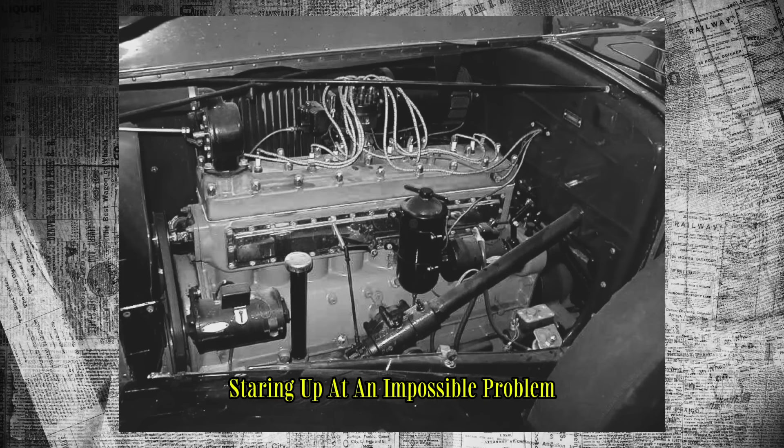Picture a mechanic in 1927, lying on his back under a Chrysler sedan, staring up at an impossible problem. Oil was leaking from the engine, seeping into the clutch mechanism buried deep between the transmission and flywheel. The car lurched and hesitated. Drivers complained, and there was no way to fix it.

The bearing that was supposed to align everything was pressed so far inside the drivetrain that you couldn't reach it with a grease gun. You couldn't service it without tearing half the car apart. It was a nightmare trapped inside a machine.

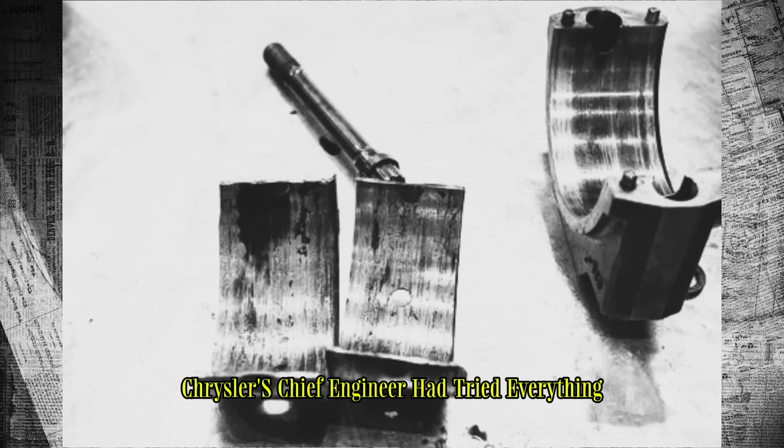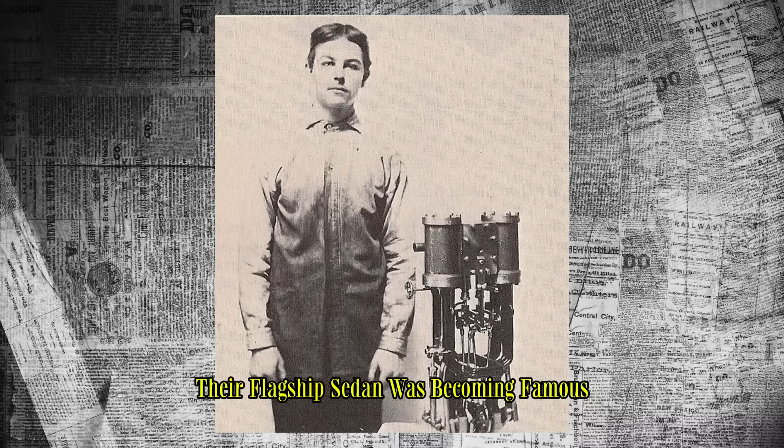Carl Breer, Chrysler's chief engineer, had tried everything. Tighter seals, they leaked anyway. Grease-packed bearings, they just attracted more oil. Every solution created a new problem. Warranty claims were piling up. The Chrysler 70, their flagship sedan, was becoming famous for all the wrong reasons. Dealers were furious, customers were frustrated, and Breer was losing sleep.

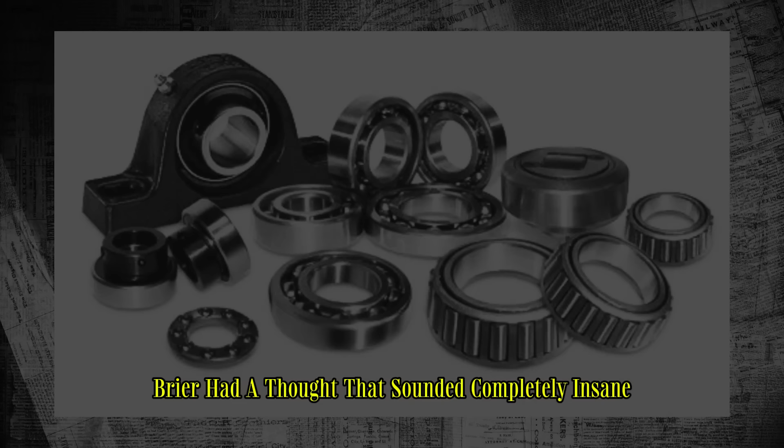Then one night, sitting in his office, surrounded by failed prototypes, Breer had a thought that sounded completely insane. What if the bearing could carry its own oil? What if you could build a piece of metal that was simultaneously solid enough to hold thousands of pounds of pressure and porous enough to store lubricant like a sponge?

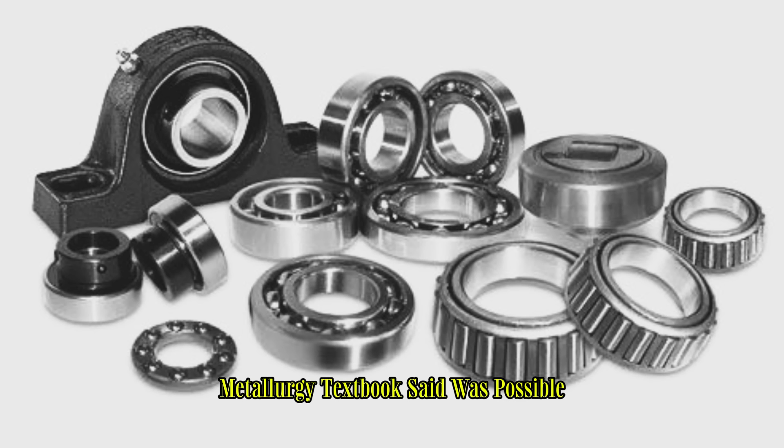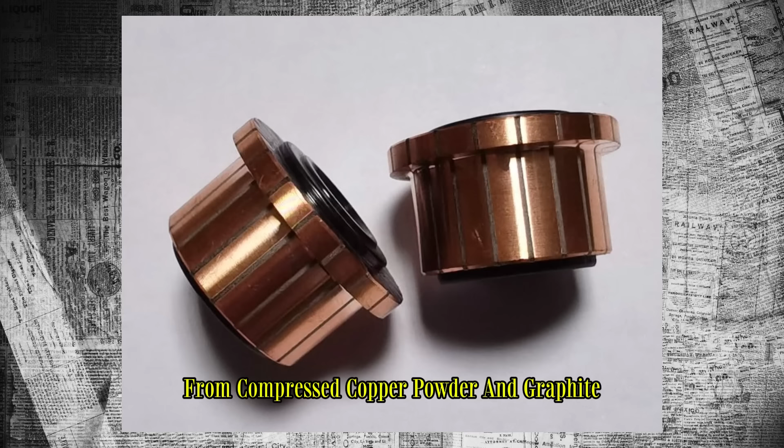It violated everything metallurgy textbooks said was possible. Solid metal didn't have holes. Porous metal crumbled under load. You couldn't have both. But Breer couldn't let it go. General Motors had already tried making a bearing from compressed copper powder and graphite. It had shattered like chalk under load. The industry laughed. Self-lubricating bearings were a fantasy.

But what if GM had been close? What if the problem wasn't the concept, it was the execution? Breer picked up the phone and called William Sherwood, a brilliant outside engineer who'd been experimenting with something called the Cutless bushing. Sherwood listened to the problem. He didn't laugh. Instead, he said something that changed everything. What if we don't just compress the powder? What if we sinter it?

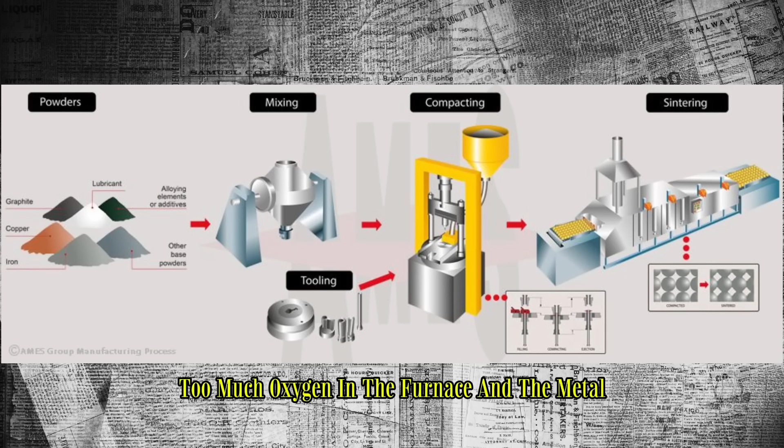Sintering. The word meant heating metal powder just below its melting point, letting the particles bond without fully liquefying. It was an ancient technique, used for centuries to make pottery. But nobody had figured out how to make it work with precision metal parts. The challenge was immense. Too much oxygen in the furnace and the metal oxidized into worthless dust. Too much heat and it melted into a solid lump with no porosity. Too little heat and the particles didn't bond at all.

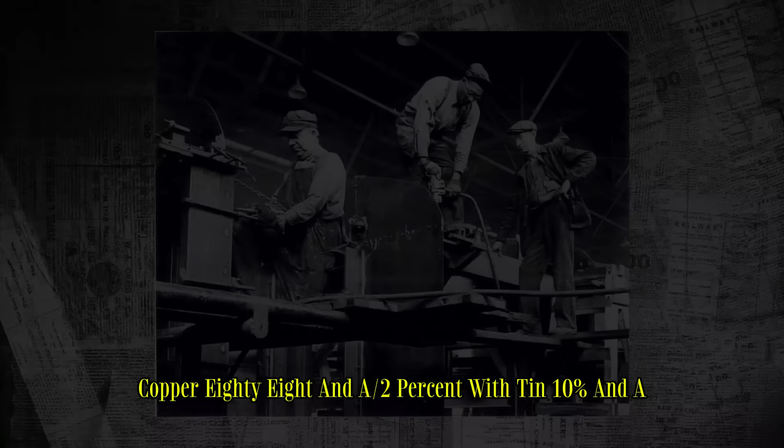Chrysler hired Sherwood immediately. They paired him with Bill Calkins, a metallurgist with a gift for understanding how metals behaved under extreme conditions. The two men disappeared into a laboratory in Detroit and began experimenting. They mixed powdered copper, 88.5%, with tin, 10%, and a tiny amount of graphite, 1.5%. They pressed the mixture into a die under tremendous pressure, compacting it into the shape of a bearing.

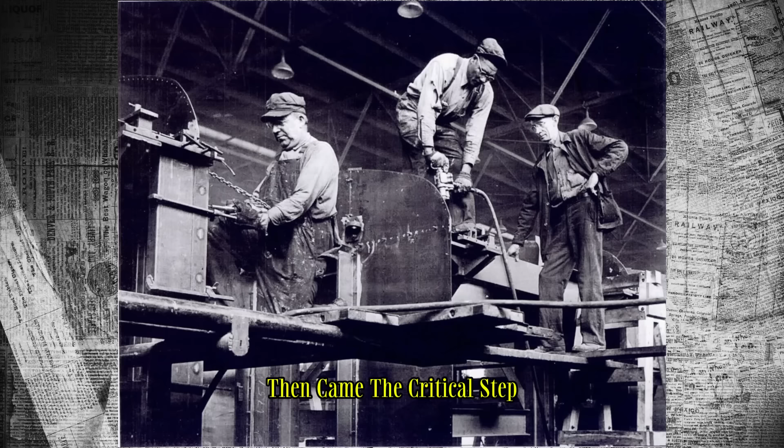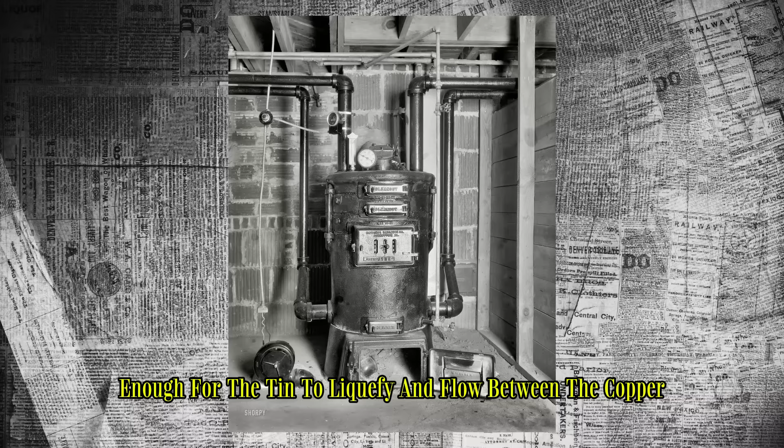Then came the critical step. They loaded the compacted part into a furnace and carefully controlled the atmosphere, removing nearly all oxygen. They heated it to precisely the right temperature. Not hot enough to melt the copper completely, but hot enough for the tin to liquefy and flow between the copper particles, bonding them into a rigid structure.

When they pulled the part from the furnace and examined it under a microscope, they saw something extraordinary. The bearing was strong as solid bronze, but it was filled with microscopic interconnected pores, like a metal sponge. It had about 25% porosity by volume, but a porous bearing wasn't enough.

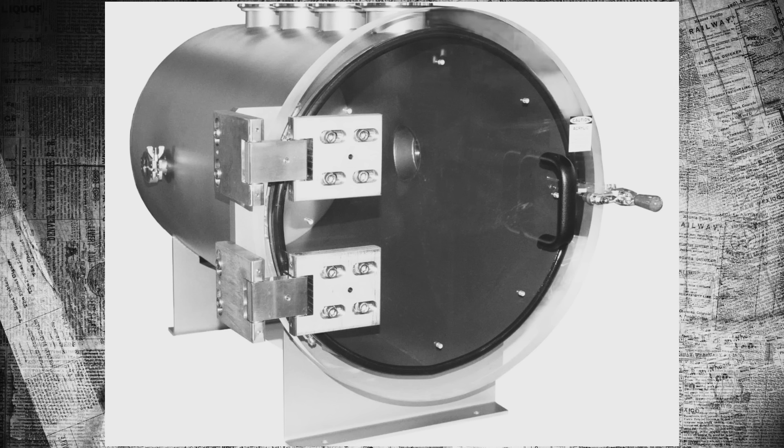It needed oil. Sherwood and Calkins placed the bearing into a high vacuum chamber, sucking all the air out of the tiny pores. Then they broke the vacuum not by letting air back in, but by exposing the part to oil. The oil rushed into the vacuum, flooding every microscopic cavity in the metal structure. They followed this with pressure, forcing the oil even deeper. When they removed the bearing and wiped it clean, it looked completely dry. But hidden inside that piece of metal was enough oil to last years.

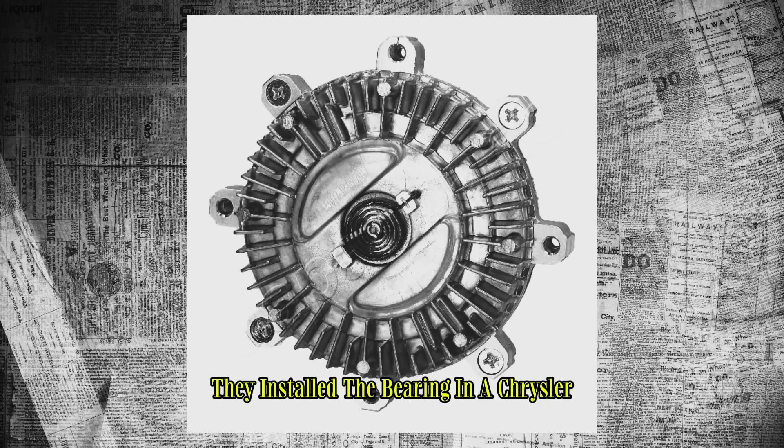The moment of truth came when they tested it under load. They installed the bearing in a Chrysler 70 clutch mechanism and ran it for hours, then days, then weeks. The bearing performed flawlessly. When friction heated the metal, the oil expanded and seeped out onto the surface, lubricating the contact point. When the bearing cooled, the oil was drawn back into the pores by capillary action. It was a self-regulating system, a bearing that maintained itself.

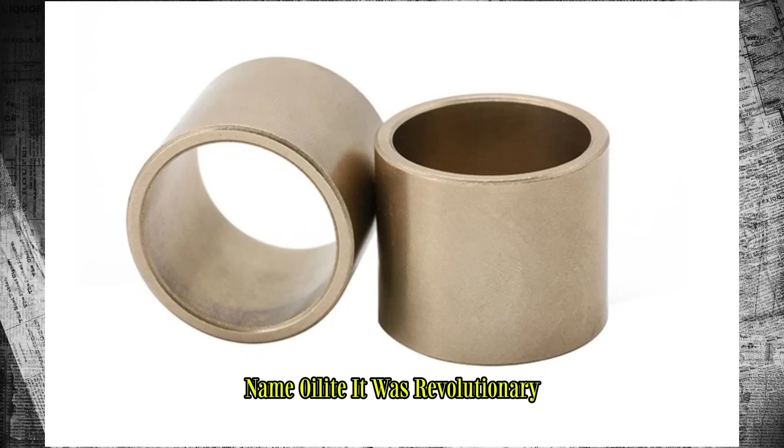In 1930, Chrysler introduced the invention to the world under the brand name Oilite. It was revolutionary. The first year they sold 500,000 bearings. The next year, 2.5 million.

By 1933, they were producing 18 million units annually, and the technology was making Chrysler a fortune even during the depths of the Great Depression. Engineers called it the floating power system when they used oil-impregnated bronze springs to eliminate squeaking in suspensions. It worked so well that the technology spread beyond automobiles into water pumps, generators, electric motors, into industrial machinery, anything with moving parts that needed lubrication in places humans couldn't reach.

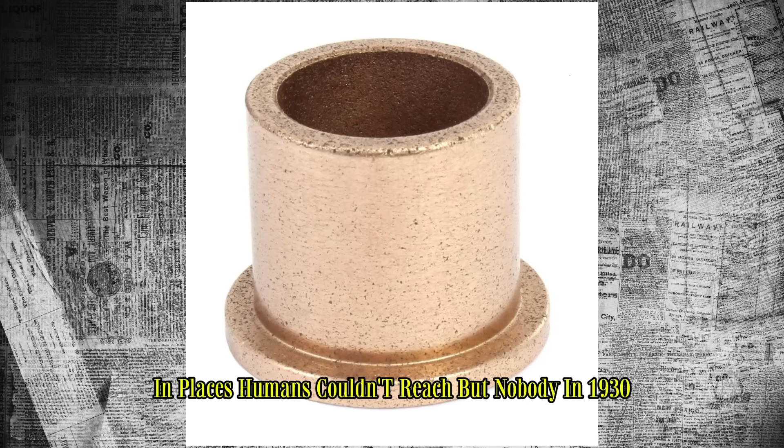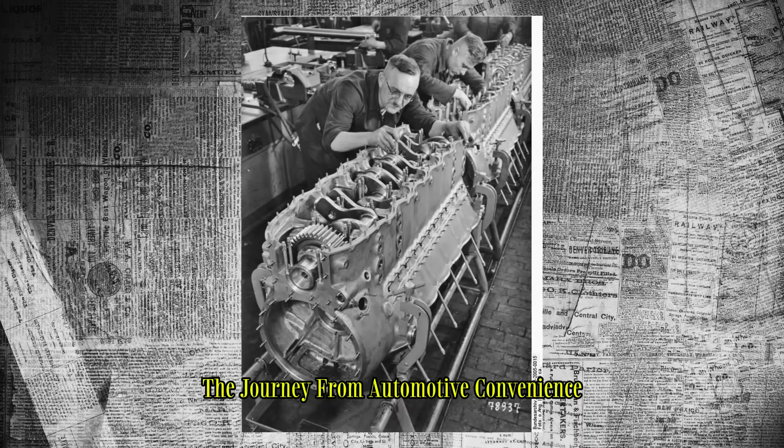But nobody in 1930 could have predicted where this invention would matter most. Nobody imagined that 15 years later, this strange metal sponge would become the difference between victory and defeat in the sands of North Africa. The journey from automotive convenience to military necessity was gradual but inevitable. Through the 1930s, Oilite bearings found their way into increasingly critical applications.

Aircraft manufacturers discovered that sintered bearings performed brilliantly in control systems, places where cables and linkages needed to move smoothly under tension, where a seized bearing could mean loss of control and catastrophic failure. The bearings worked at altitude, in freezing temperatures, in conditions where conventional grease became useless.

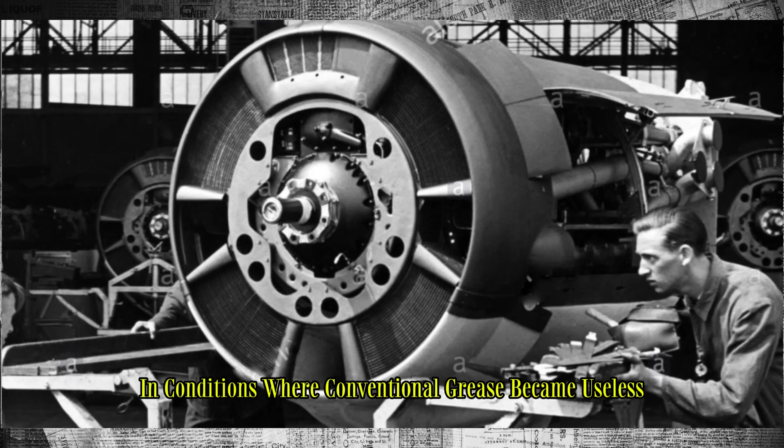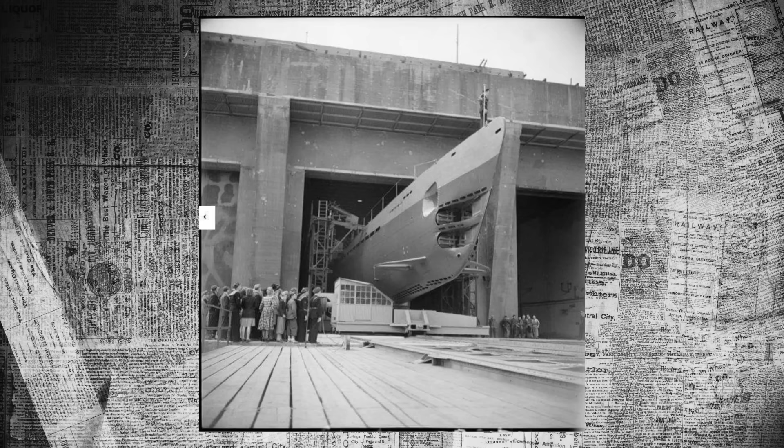Ship designers incorporated them into steering mechanisms, in winches and hoists, in auxiliary systems throughout vessels. The maritime environment was brutal on conventional bearings. Salt spray corroded metal. Constant motion and vibration worked grease out of bearing surfaces. But sintered bearings, with oil locked inside their structure, resisted corrosion and maintained lubrication regardless of external conditions.

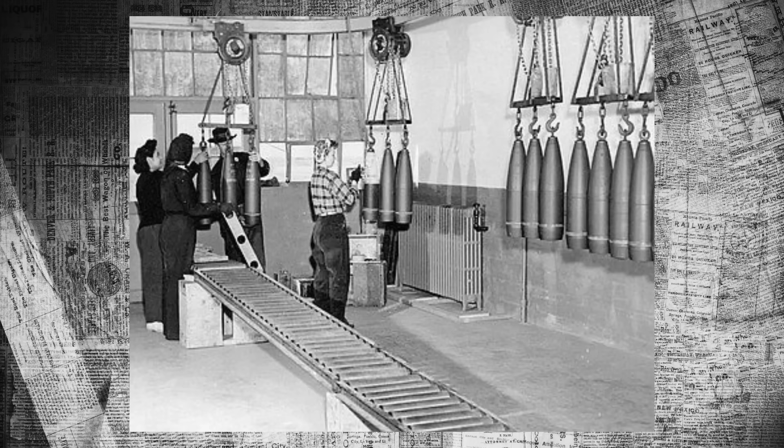Industrial engineers used them in textile mills, in printing presses, and conveyor systems. Anywhere dust or contaminants made external lubrication problematic, self-lubricating bearings offered an elegant solution. The technology was spreading, finding niches, proving itself, in application after application. By the time war broke out in Europe in 1939, sintered metal bearings had become a mature, proven technology ready for their greatest test.

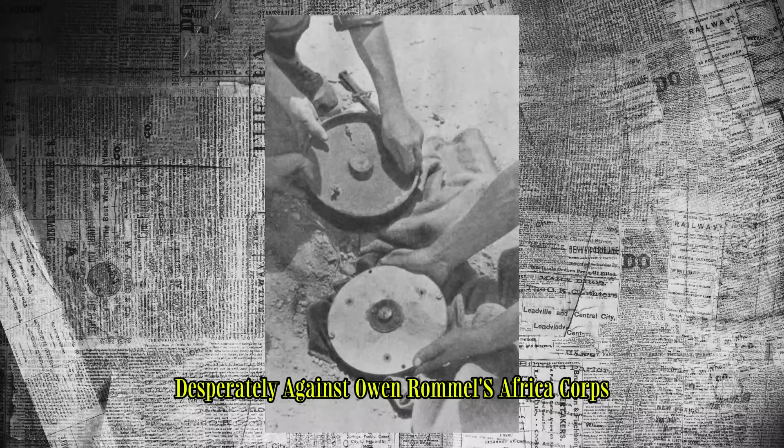June 1942. The North African desert was a furnace. Temperatures soared past 120 degrees Fahrenheit. Sand infiltrated everything, abrading metal, clogging filters, destroying machinery. The British 8th Army was fighting desperately against Rommel's Afrika Korps, and they were losing. Not just battles, they were losing their tanks. British armour was plagued by mechanical failures. The extreme heat and sand were murdering conventional ball bearings.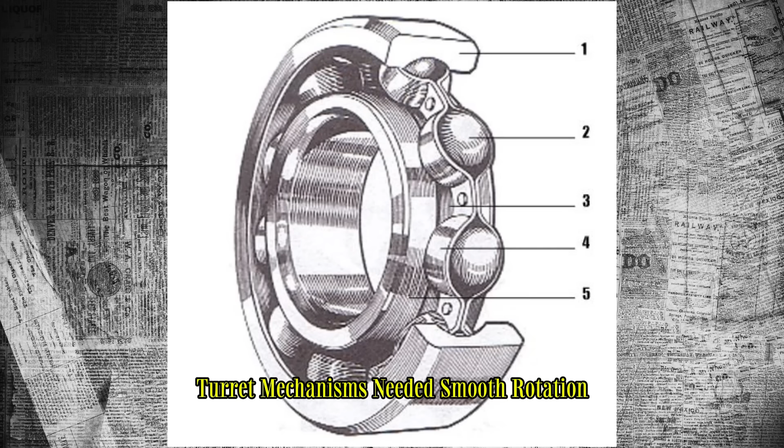The problem was everywhere. Tank tracks used hundreds of bearings at each link. Engine components relied on precision bearings that couldn't tolerate contamination. Turret mechanisms needed smooth rotation under the weight of tons of armour and weaponry. When bearings failed, the entire machine became useless. British mechanics worked around the clock trying to keep armour operational, but they were fighting a losing battle against the environment.

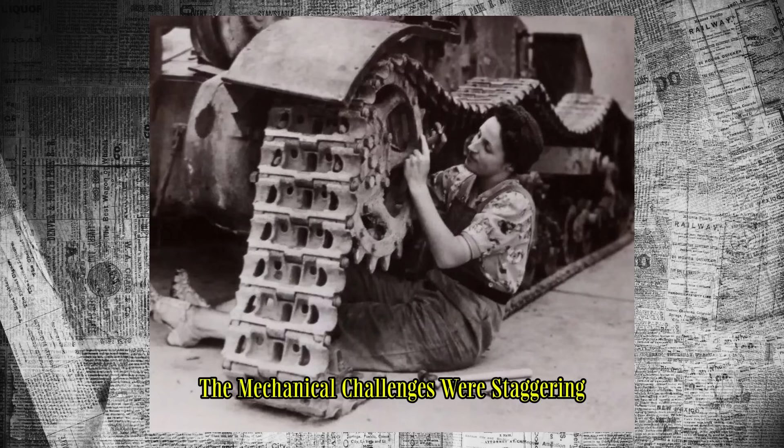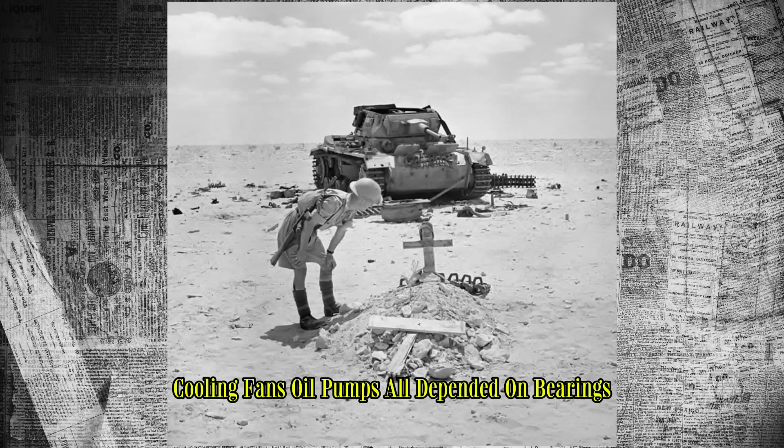The mechanical challenges were staggering. A single tank contained hundreds of bearing surfaces. The main gun turret rotated on a massive bearing ring that had to support multiple tons while allowing smooth, precise movement for targeting. The transmission required dozens of bearings to handle the brutal shock loads of starting, stopping and turning a 30-ton vehicle. The engine accessories, generators, cooling fans, oil pumps, all depended on bearings that needed to function in an environment filled with sand, heat and vibration.

German tanks faced similar problems, but they had something the British didn't: years of preparation. The Wehrmacht had been preparing for desert warfare since the mid-1930s, testing equipment in controlled environments, developing specialized maintenance procedures. Their tanks incorporated design features specifically intended to cope with sand and heat. But even with preparation, Rommel's forces struggled with mechanical reliability. The desert was an equal opportunity destroyer of machinery.

British tank crews developed a grim understanding of their equipment's limitations. They learned to nurse failing transmissions, to recognize the sound of a bearing beginning to seize, to know exactly how far they could push a wounded machine before it died completely. Tank commanders factored mechanical failure into their tactical planning, assuming a certain percentage of their force would be immobilized not by enemy fire, but by their own machinery betraying them at critical moments.

Then American tanks began arriving. M3 Grants and M4 Shermans shipped across the Atlantic under the Lend-Lease program. These tanks performed differently in the desert. They didn't overheat as quickly. Their mechanical reliability was noticeably better. British tank crews who'd been struggling with their own equipment were stunned by how well the American machines held up. The secret was buried in components that nobody thought to examine closely.

Self-lubricating sintered bearings, the technology that had started as a solution to a leaking clutch in a Chrysler sedan, had found its way into American military equipment. These bearings didn't rely on external grease that could melt or leak. The oil was locked inside the metal structure itself, protected from contamination, feeding onto bearing surfaces only when heat and friction demanded it.

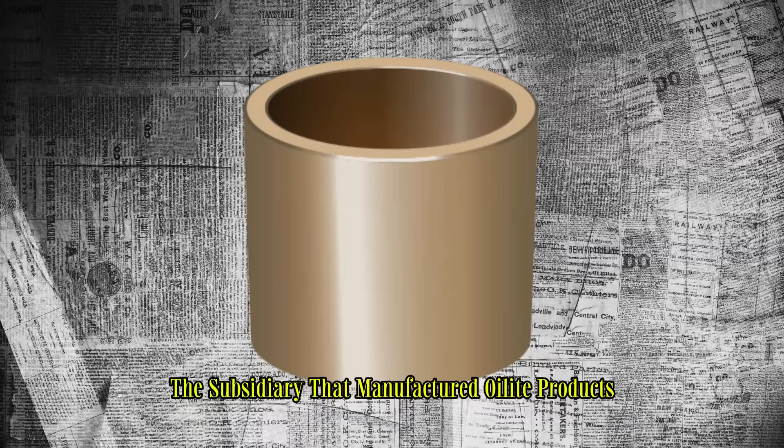American military planners had recognized the potential of sintered metal technology years before the war. Chrysler's Amplex division, the subsidiary that manufactured Oilite products, had been quietly supplying the military with specialized bearings for aircraft, ships, and vehicles. When war production ramped up after Pearl Harbor, Amplex became a critical supplier. They produced bearings for tank transmissions, aircraft control systems, ship propeller shafts, artillery mechanisms, anywhere conventional bearings were failing under extreme conditions.

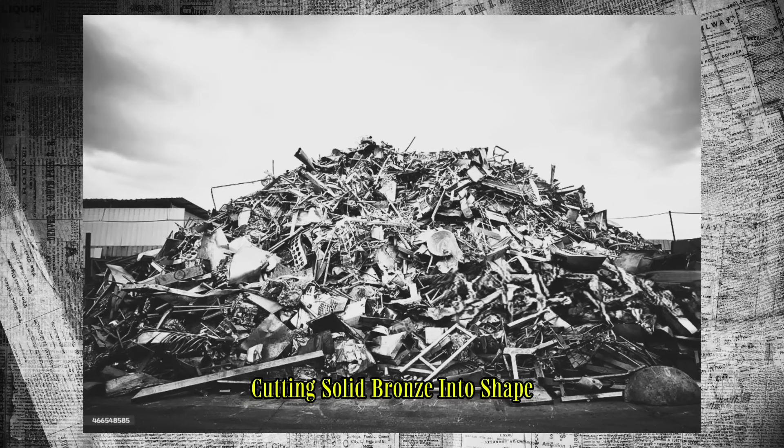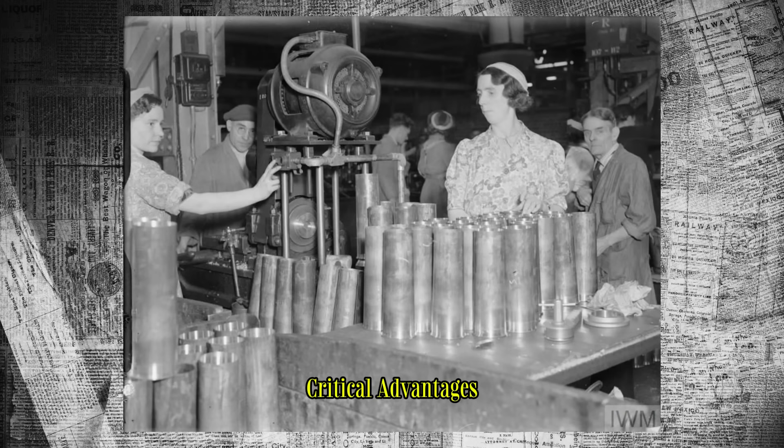The statistics were staggering. Amplex saved hundreds of thousands of machinist hours during the war by producing high-precision sintered products without waste. Traditional bearings required extensive machining, cutting solid bronze into shape, generating massive amounts of scrap. Sintered bearings were formed to near final dimensions directly from powder, requiring minimal finishing work. This meant faster production, less material waste, and components that could be manufactured by less experienced workers, critical advantages when experienced machinists were in short supply.

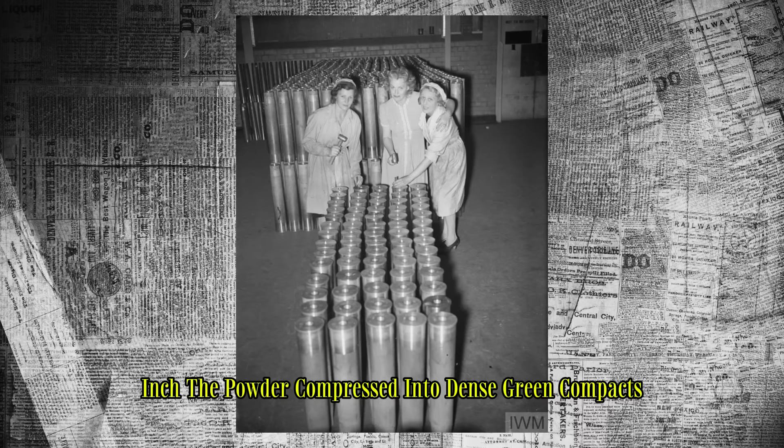The production process was a true marvel of wartime efficiency. Raw materials arrived as fine metal powders. Workers mixed precise ratios of copper, tin, and graphite. The powder was fed into hydraulic presses equipped with precision dies. Under pressures exceeding 40 tons per square inch, the powder compressed into dense green compacts. These compacts moved into enormous sintering furnaces operating continuously, maintaining precise temperatures and carefully controlled atmospheres.

The sintering process took hours, parts slowly heating, the tin melting and flowing between copper particles. After sintering, bearings moved to sizing operations. Then came oil impregnation, bearings loaded into vacuum chambers, air evacuated, oil introduced under pressure.

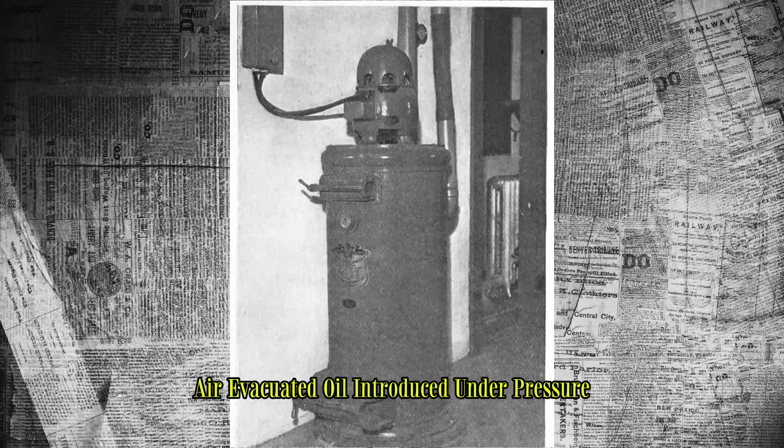But the real value wasn't in production efficiency, it was in performance. In the heat of North Africa, self-lubricating bearings kept American tanks moving when British and German equipment was breaking down. Tank crews didn't understand why their machines were more reliable. They just knew they could push harder, fight longer, and make it back to base for refueling while enemy armor was stranded in the sand.

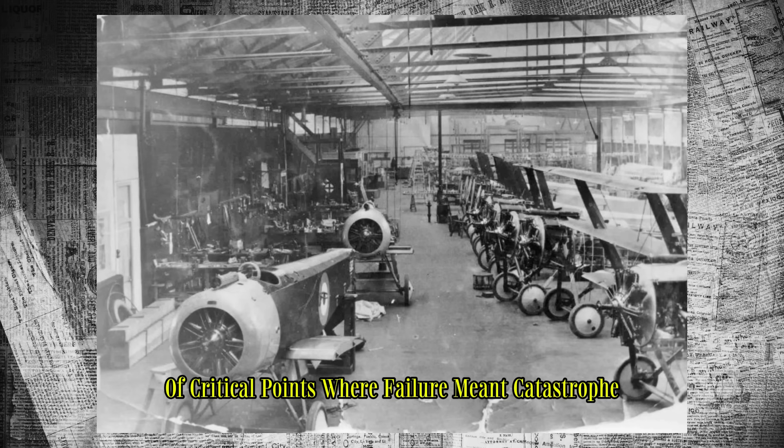Aircraft mechanics discovered similar advantages. Warplanes used bearings in control linkages, landing gear mechanisms, engine accessories, dozens of critical points where failure meant catastrophe. Conventional bearings in aircraft required constant maintenance, regular greasing, careful inspection. But sintered bearings could be installed and forgotten. They worked in conditions that would destroy standard equipment: high-altitude cold, tropical humidity, salt spray over oceans. Pilots flew missions in aircraft whose reliability depended on components most of them never knew existed.

Naval vessels faced even harsher conditions. Saltwater corroded everything. Conventional bearings in ship machinery required constant attention, regular replacement, expensive maintenance. Self-lubricating bearings resisted corrosion, operated reliably in wet environments, lasted longer between service intervals. Destroyer crews running convoy escorts across the Atlantic didn't have time for elaborate maintenance routines. Equipment either worked or it didn't. Sintered bearings worked.

By 1943, Amplex occupied a 5-acre facility in Detroit with nearly 200,000 square feet of floor space. The operation had expanded far beyond Chrysler's original clutch bearing problem. They were producing specialized components for virtually every branch of the military, custom-designed bearings for specific applications, materials engineered to handle extreme loads, temperatures, and environmental conditions.

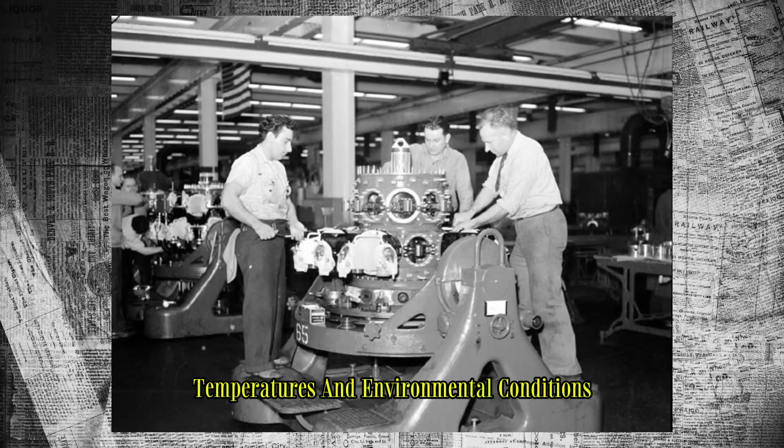The technology kept evolving. Engineers discovered they could vary the porosity by adjusting the sintering process. High-porosity bearings with maximum oil content were perfect for high-speed light-load applications like fractional horsepower motors. Low-porosity bearings with higher graphite content worked better for oscillating and reciprocating motion, where building an oil film was difficult. They created Super Oilite, an iron-based material that was harder and stronger than bronze, capable of handling higher loads at slower speeds.

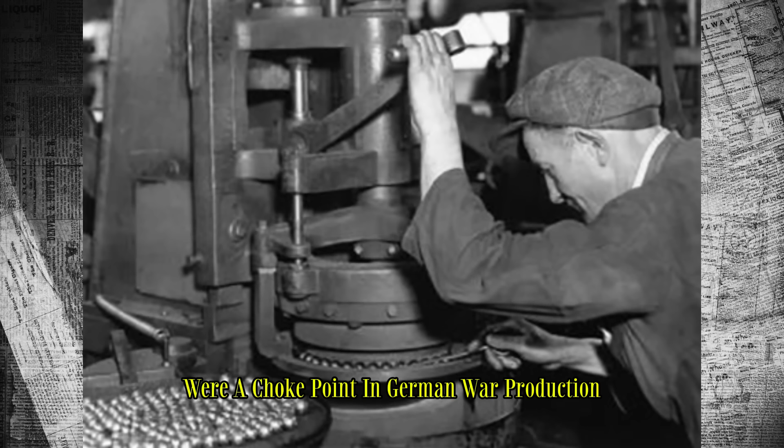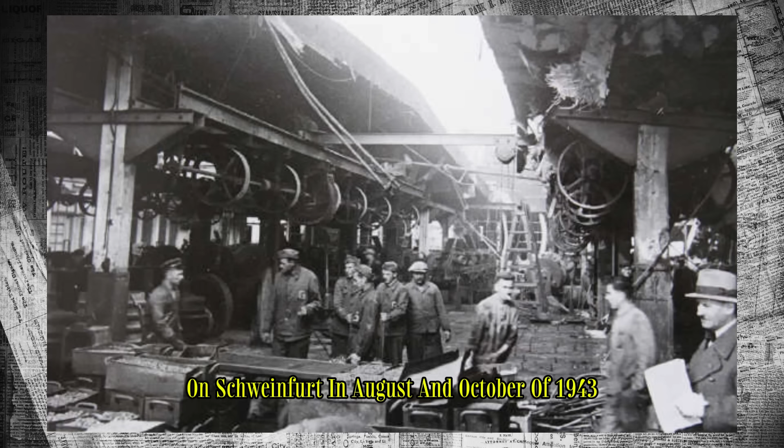Meanwhile, ball bearing production had become a critical strategic target. Germany's bearing industry, concentrated in the city of Schweinfurt, was subjected to devastating Allied bombing raids. The Americans recognized that ball bearings were a choke point in German war production. Without bearings, tanks couldn't move, aircraft couldn't fly, submarines couldn't operate. The 8th Air Force launched massive daylight raids on Schweinfurt in August and October of 1943, suffering horrific losses but temporarily destroying a significant portion of the German bearing production capacity.

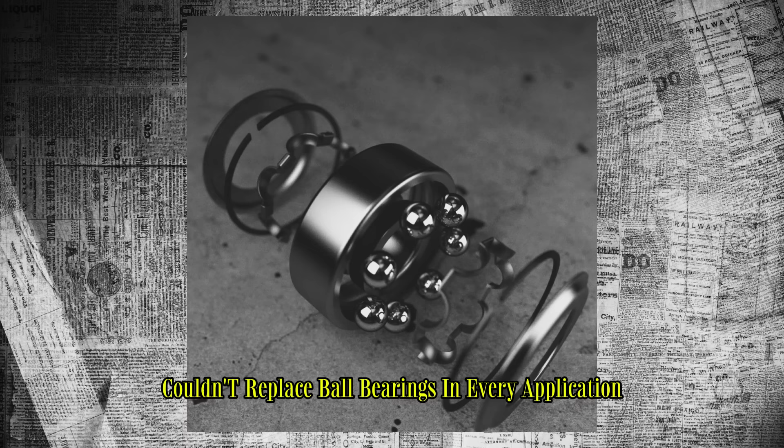The irony was that while both sides fought desperately over ball bearing factories, American forces were increasingly relying on a completely different technology. Sintered bearings couldn't replace ball bearings in every application. They weren't suitable for extremely high speeds or the heaviest loads. But for thousands of applications where conventional bearings were failing, where maintenance was difficult, where environmental conditions were extreme, the metal sponge Carl Breer had invented was quietly winning the war.

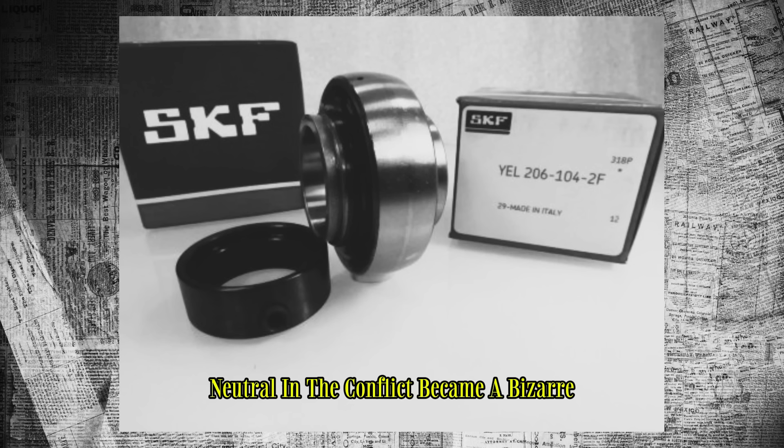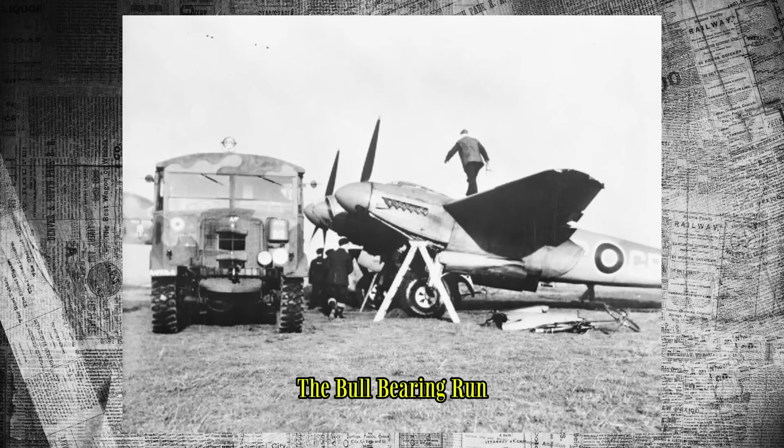Sweden, neutral in the conflict, became a bizarre battlefield in the bearing war. The Swedish company SKF produced high-quality ball bearings that both Germany and Britain desperately needed. British intelligence organised daring operations to smuggle Swedish bearings across German-occupied Norway, flying de Havilland Mosquito aircraft painted in civilian colours on what became known as the Ball Bearing Run. These flights transported critical bearing supplies to England while Swedish factories simultaneously sold to Germany. It was estimated that 58% of German ball bearings came from Sweden, while Britain received 31% of its supply from the same source.

But American forces weren't caught in this desperate scramble. They had an alternative. Powder metallurgy plants across the United States were churning out millions of self-lubricating bearings using technology that was difficult to bomb, easy to scale, and didn't require the extreme precision machining that made ball bearings so difficult to produce. When conventional bearing supplies were disrupted, American equipment kept running.

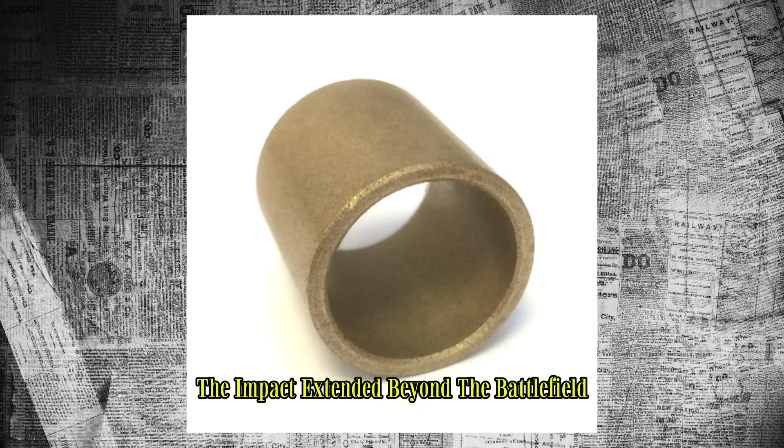The impact extended beyond the battlefield. Industrial production on the home front relied heavily on bearings. Factories manufacturing tanks, aircraft, ammunition, ships, everything needed to win the war, all depended on machinery filled with bearings. Every production delay caused by bearing failures meant fewer weapons reaching the front lines. Self-lubricating bearings in factory equipment reduced maintenance downtime, increased production reliability, and freed up skilled machinists for more critical work.

After the war ended in 1945, many assumed sintered bearing technology would become obsolete. The jet age was beginning. Frank Whittle's revolutionary jet engines didn't need propellers or the complex mechanical systems that had driven piston-powered aircraft. Surely the future would be high-tech, sophisticated, beyond the need for simple metal sponges impregnated with oil. But physics doesn't care about assumptions.

Jets were fast, but they were incredibly thirsty for fuel. For cargo transport, short-haul flights, regional aviation, anything where fuel efficiency mattered more than raw speed, propeller-driven aircraft remained essential. And those aircraft needed reliable bearings in harsh environments. Engineers took jet engines and bolted propellers to the front, creating turboprops. The result was aircraft like the C-130 Hercules, workhorses that have been flying for over half a century, and inside their systems, descendants of Carl Breer's invention continue working.

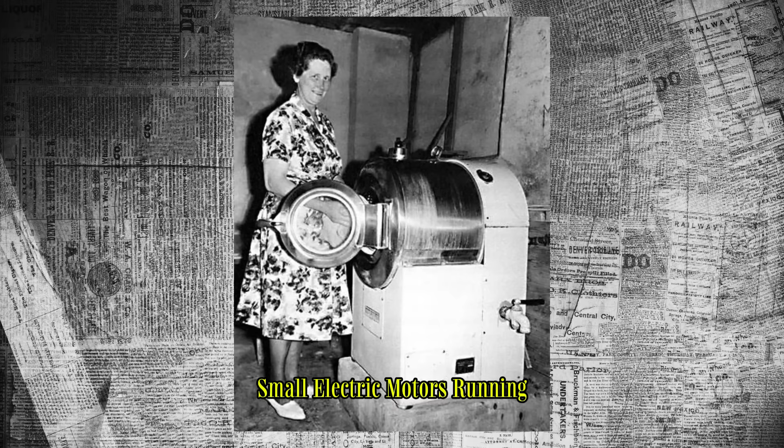The technology spread into industries nobody had anticipated. Home appliances, washing machines, refrigerators, fans, all filled with small electric motors running self-lubricating bearings. Business machines, copiers, printers built around mechanisms that needed to operate reliably for years without maintenance. Medical equipment, imaging machines, surgical tools, devices where failure could cost lives. Construction equipment, agricultural machinery, industrial robots. Anywhere engineers needed components that worked in dirty, hostile environments without constant attention.

By the 1990s, the original Amplex division had been sold and resold, merged and rebranded, finally becoming part of the world's largest powder metal component manufacturer. But their fundamental technology remained unchanged. Modern sintered bearings use computer controls and advanced materials science, but the basic principle is identical to what Sherwood and Corkins developed in that Detroit laboratory in 1927.

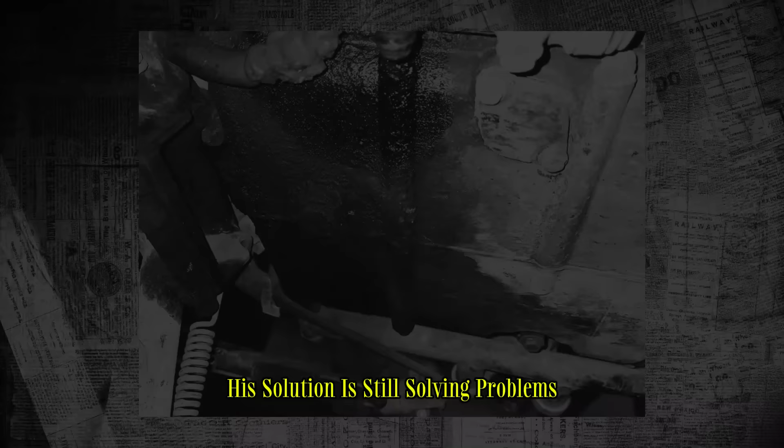The numbers tell the story. In 1930, Chrysler sold 500,000 Oilite bearings. Today, the powder metallurgy industry produces billions of sintered components annually, valued at billions of dollars. Nearly a century after Carl Breer stared at that impossible problem under a Chrysler sedan, his solution is still solving problems. Think about what actually happened here.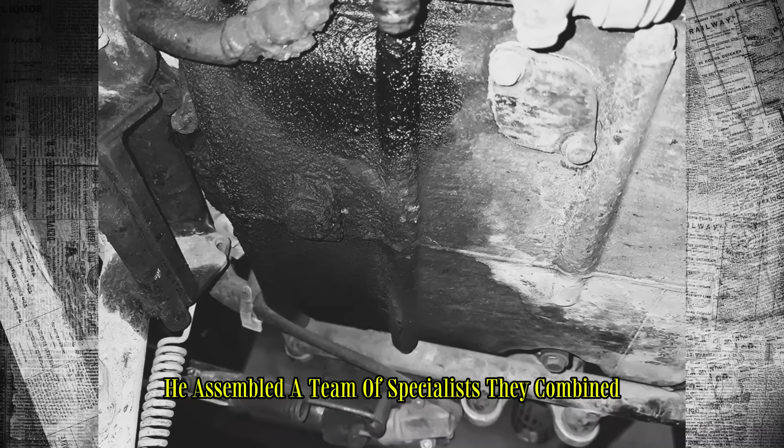An engineer facing a mundane problem, oil leaking into a car clutch, refused to accept that the problem was unsolvable. He assembled a team of specialists. They combined ancient techniques with modern understanding of metallurgy. They created something that violated conventional wisdom. And that invention, born from automotive frustration, ended up influencing the outcome of the largest war in human history. This is how technology actually advances, not through dramatic breakthroughs in isolation, but through persistent problem-solving that creates unexpected solutions that find applications nobody predicted.

The self-lubricating bearing didn't win World War II by itself. Wars are won by logistics, strategy, courage, sacrifice, countless factors. But when American tanks kept running in the North African desert while enemy armor broke down, when aircraft flew missions without bearing failures, when production lines ran without maintenance delays, a piece of metal invented to fix a leaking clutch was quietly doing its part.

Carl Breer died in 1970, largely unknown outside automotive engineering circles. William Sherwood died even earlier, in 1933, just 3 years after his invention reached production. Neither man became famous. History books focus on generals and politicians, on battles and treaties. They rarely mention the engineers who solved problems that made victory possible. But walk into any factory, any machine shop, any industrial facility. Look at the motors, the pumps, the conveyors, the machinery that keeps modern civilization running.

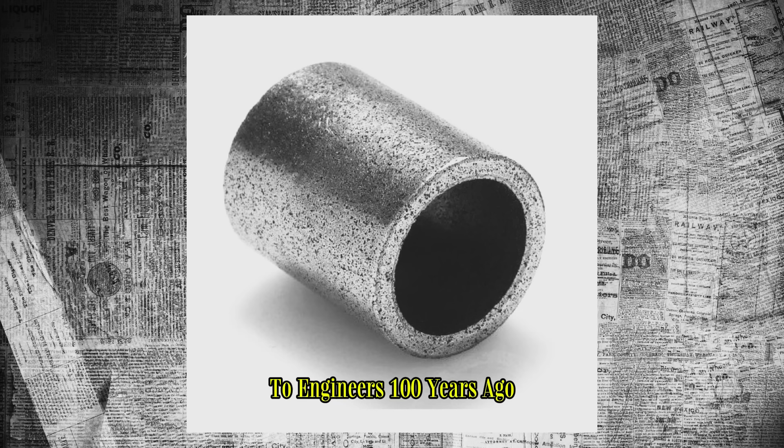Inside those machines, hidden from view, are bearings that carry their own oil, metal sponges that would have seemed impossible to engineers 100 years ago. And every single one traces back to a frustrated engineer in Detroit who refused to accept that a problem had no solution. The British knew this, even if they didn't say it publicly.

When Lend-Lease shipments of American tanks arrived in Egypt, British mechanics examined them carefully, looking for the secret of their reliability. They found better engines, superior armor layout, more effective weapons, but they also found hundreds of small components that worked differently, better. Bearings that didn't fail, seals that didn't leak, parts that had been engineered not just for performance, but for survival in hostile conditions.

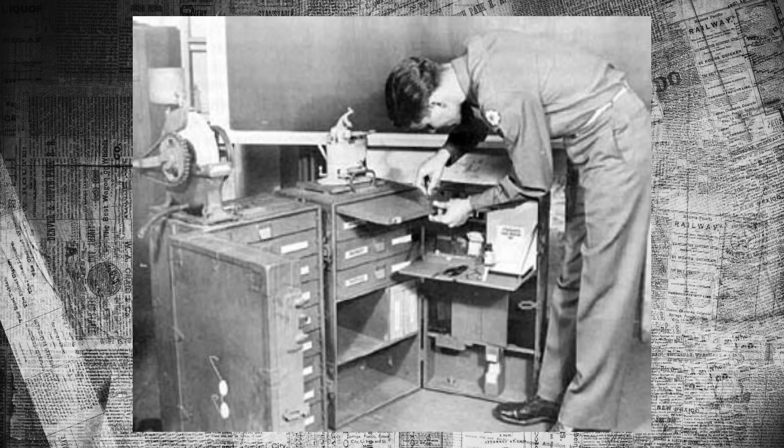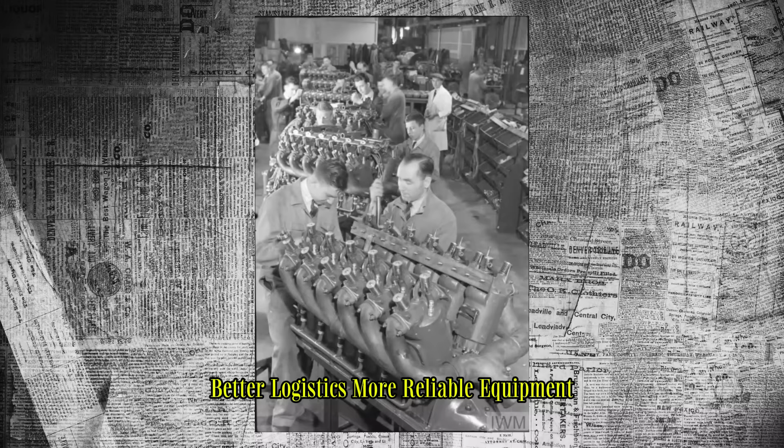American engineering during World War II gets remembered for the dramatic achievements: the Manhattan Project, radar, proximity fuses, mass production of the Liberty ships and B-24 bombers. These were extraordinary accomplishments. But wars are also won by the accumulation of small advantages: better logistics, more reliable equipment, components that keep working when everything else fails.

In the archives of the Chrysler Corporation, buried in boxes of technical documents, are the original patents for the sintered bronze bearing. The language is dry, technical, written for patent examiners and engineers. There's no mention of tanks or aircraft or saving lives. Just careful descriptions of powder composition, sintering temperatures, vacuum impregnation procedures. Reading those documents, you'd never guess you were looking at technology that would help change the world.

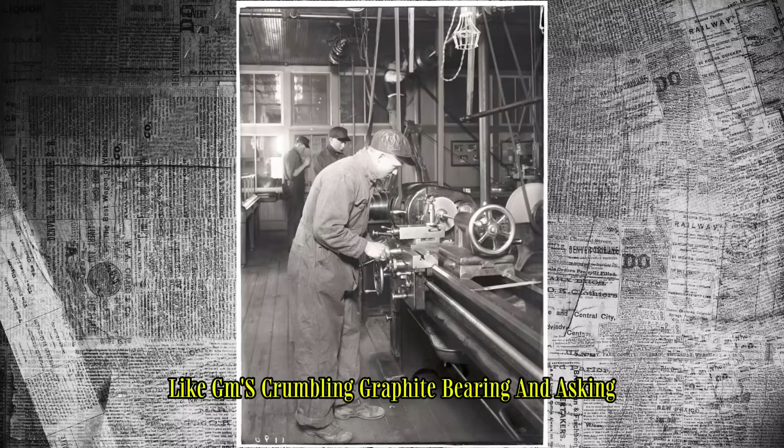That's the nature of engineering. The dramatic stories, the brilliant insights, those are real, but they're rare. Most progress comes from solving mundane problems well, from refusing to accept that something can't be done, from taking a failure, like GM's crumbling graphite bearing, and asking what would happen if you changed just one variable.

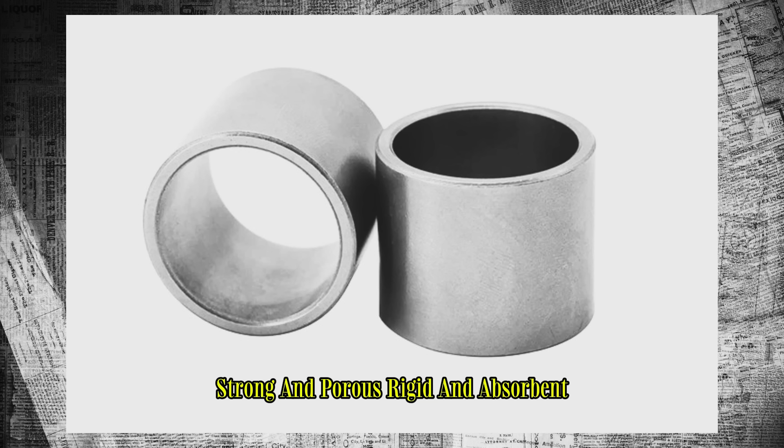Carl Breer changed the temperature. William Sherwood controlled the atmosphere. Bill Calkins perfected the metal mixture. Together, they created metal that was simultaneously strong and porous, rigid and absorbent, permanent and self-maintaining. A paradox made real through careful engineering.

Today, if you tear apart an electric motor, you'll find bearings that look like simple bronze sleeves. Unremarkable, ordinary. But if you could examine them under a microscope, you'd see a universe of interconnected pores filled with oil, a three-dimensional maze of passages and chambers that feeds lubricant to the surface exactly when and where it's needed. You'd see engineering that has outlasted the engineers who created it.

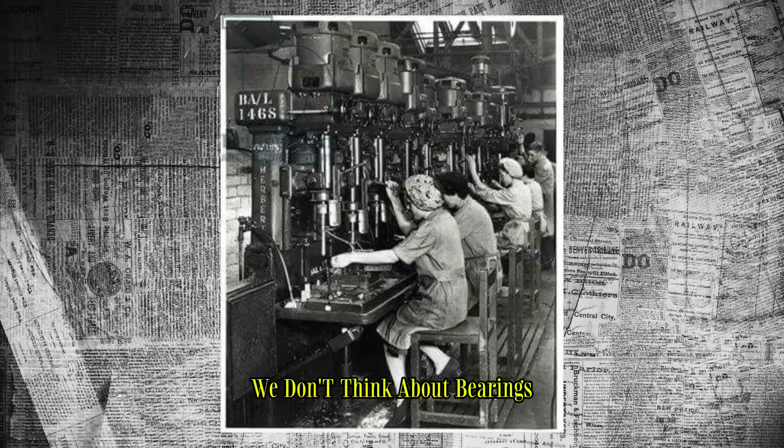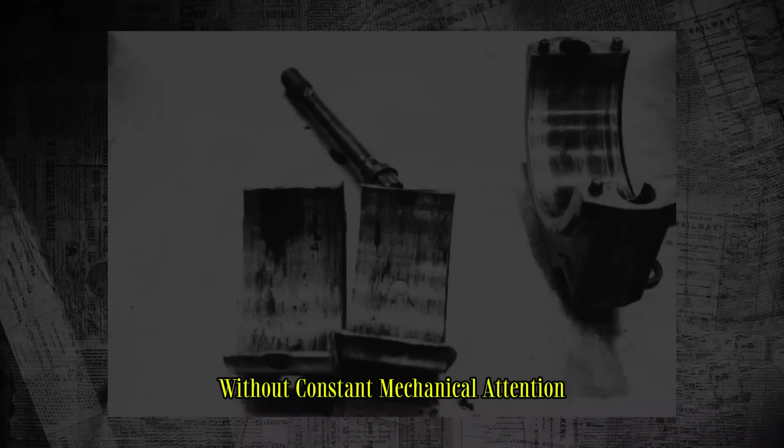This is the forgotten invention. Not forgotten because it failed, but because it succeeded so completely it became invisible. We don't think about bearings. We don't wonder why our appliances run for years without maintenance, why industrial equipment operates in conditions that would have destroyed machinery a century ago, why military vehicles can fight in deserts and jungles and Arctic wasteland without constant mechanical attention. We don't think about it because the engineers solved the problem.

They built reliability into the metal itself. They created components that work so well we can ignore them. And in doing so, they demonstrated something profound about technology and progress. The best engineering is invisible. It's the bridge that doesn't collapse, the aircraft that doesn't crash, the machine that works so consistently we forget it's even there.

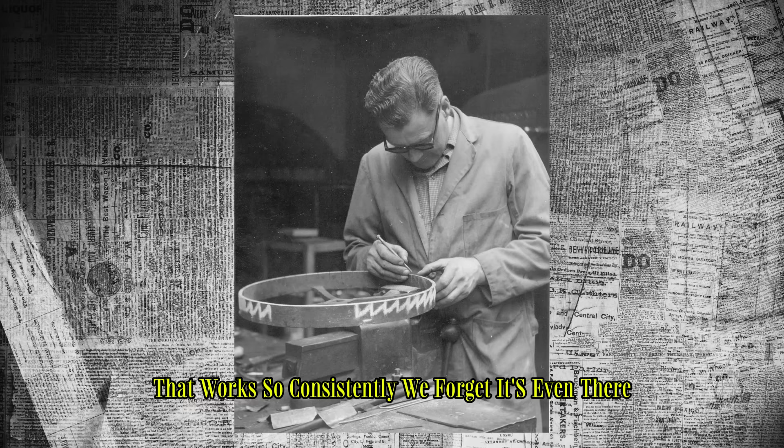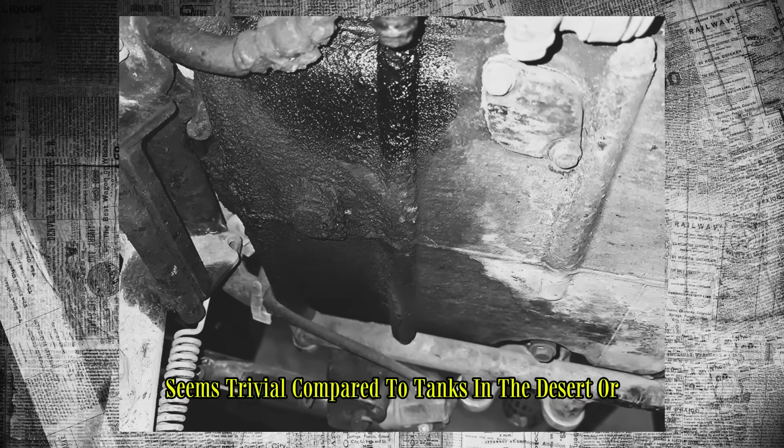Carl Breer's clutch bearing was supposed to be invisible, buried deep in the Chrysler drivetrain where nobody would see it. Instead, it became invisible by working so perfectly that nobody needed to think about it. That 1927 problem, oil seeping into a clutch mechanism, seems trivial compared to tanks in the desert or aircraft over the Atlantic. But every great achievement starts with someone refusing to accept a small failure.

Breer could have redesigned the clutch location, moved the bearing to an accessible position, made it easier to service. That would have solved the immediate problem. Instead, he invented a bearing that didn't need servicing. He solved not just his problem, but thousands of problems nobody had encountered yet.

When American tank crews in North Africa opened the throttle and their machines responded, when mechanics examined transmissions after brutal combat and found bearings still functioning perfectly, when production supervisors in Detroit factories checked machinery that had run for months without maintenance, they were benefiting from a solution to a problem they never knew existed.

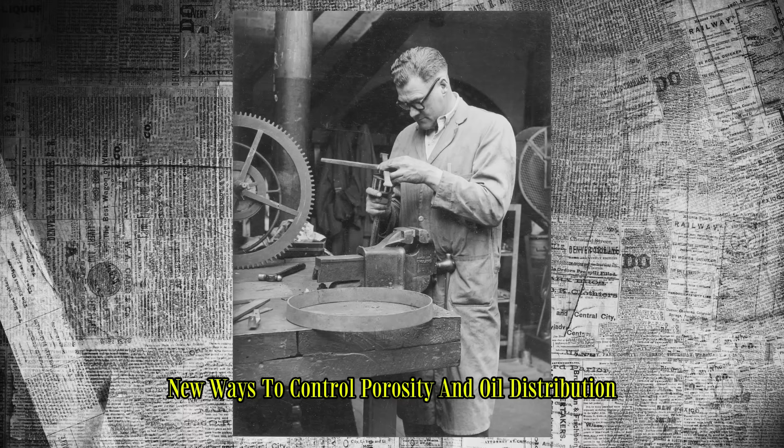The self-lubricating bearing is still evolving. Modern materials science has created new alloys, new sintering techniques, new ways to control porosity and oil distribution. But the fundamental principle remains Carl Breer's insight from 1927. You can build metal that is simultaneously solid and porous. You can create components that maintain themselves. You can engineer reliability into the material itself. Nearly a century later, that insight is still changing the world, one invisible bearing at a time.